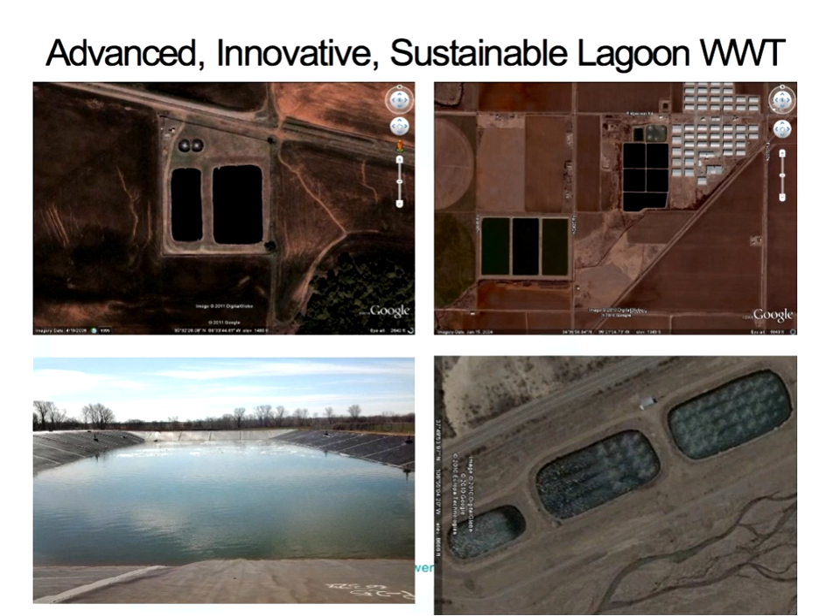So I want to thank you again for tuning in to this discussion, and people that really want to advance their knowledge, I really commend you for being on this webinar and taking time out of your day. I hope you'll learn some new information and can take this to possibly some of your clients. Next.

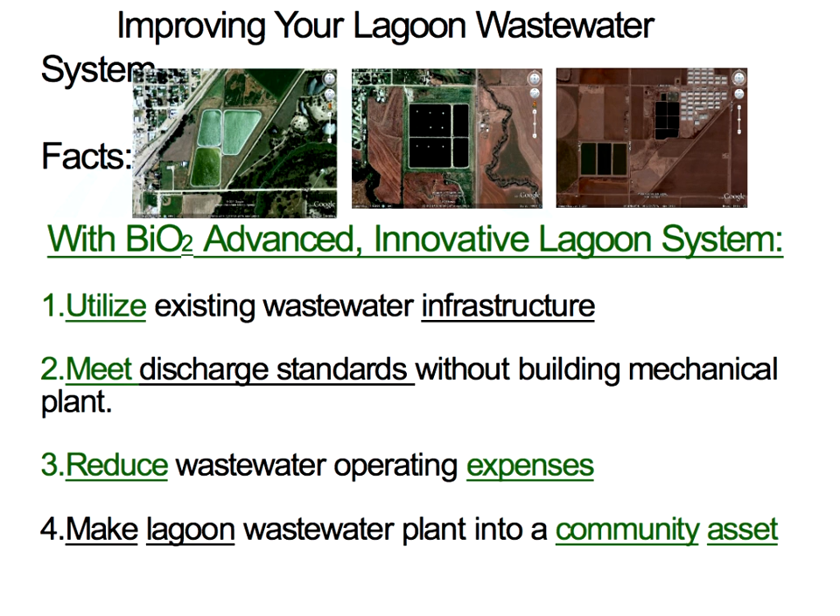Okay, there's some facts about BiO2 Advanced and Innovative Lagoon System. One, you can utilize your existing infrastructure. You don't have to do anything other than what you have, your lagoon system. You can meet the discharge standards without building mechanical plants. You can reduce your wastewater operating expenses, everybody wants to reduce their expenses. And best of all, you can make your lagoon into a community asset. Next.

We're facing more stringent standards in a lot of different areas with nutrients, personal care products, and viruses, those types of things. There is also less funding. The USDA, the Department of Local Affairs, and the state revolving funds are running out of money as well. Not as many projects can be funded, and we'll make the argument today that by putting in the BiO2 system, those funding mechanisms will be able to fund more projects over time. And of course, we're all concerned with electrical costs, which are going to continue to go up.

So before we talk about sustainable, advanced wastewater reuse, I should have put some different slides in, but we all get the point. We want to use our resources and reuse them as much as we can. When I taught this class about BiO2 across the country, there were a few things I wanted to cover when talking about lagoon systems, either new things or misconceptions I'd like to bring up right now before we go on.

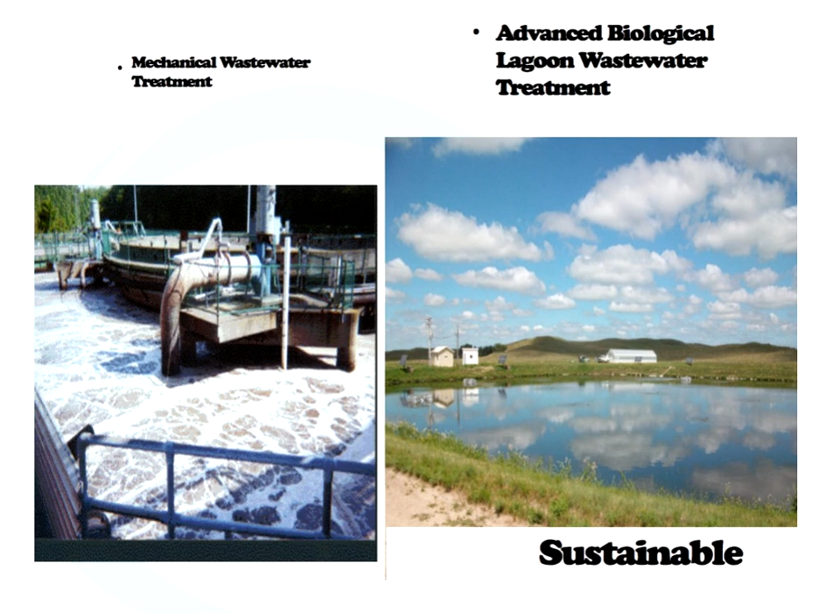Most wastewater treatment lagoons, a great deal of them, because of eutrophication and available nutrients, have a bad mat-forming algae. When I said algae, or referred to myself as a microalgae specialist, people in the classroom would turn green and their eyes would glaze over. I realized quickly that algae was a bad word, so we had to clear up the misconception about what algae is. There's bad mat-forming algae, and this bad algae is actually a cyanobacteria. Most of it is cyanobacteria in the lagoon.

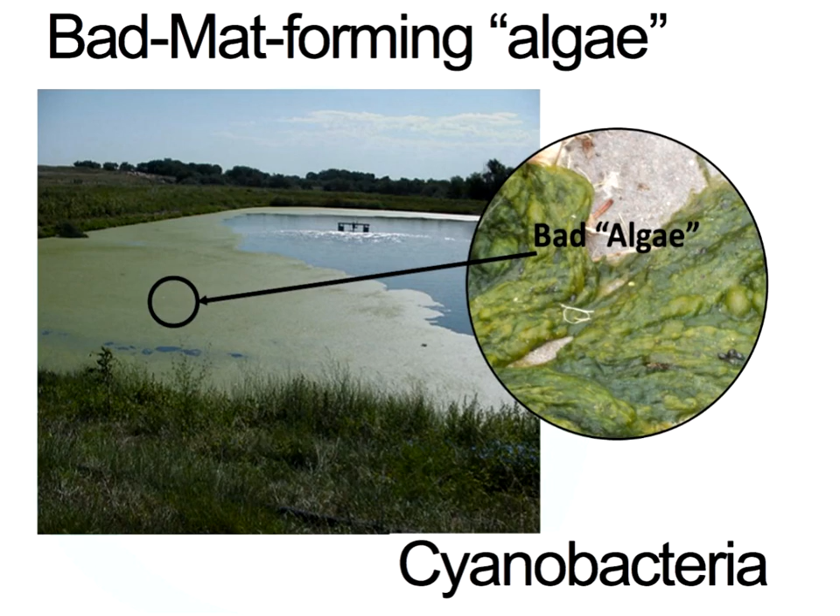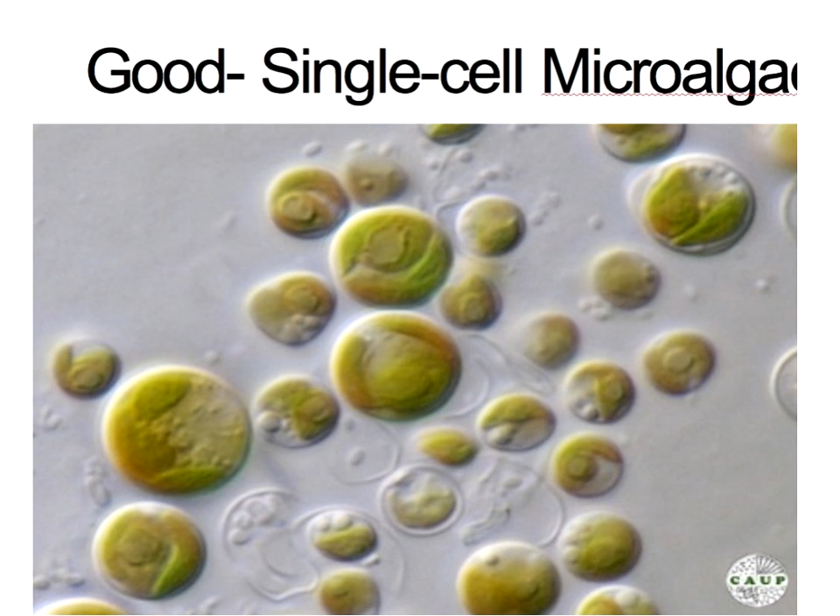Now, to contrast that, there's good single-celled microalgae that the BiO2 system utilizes to produce oxygen into the system.

The bad algae has some characteristics: it causes odors, increases total suspended solids, at times excretes toxins, can clog equipment, and can shade the lagoon. The lagoon wants to produce lots of oxygen, but it can't because the sun doesn't get into the lagoon to let the good bacteria do what they need to do.

The good microalgae that BiO2 uses are single cell. They do not form mats. They're very quick producers—their population triples or quadruples every 24 hours. They swim, and most importantly, they create pure oxygen that goes into the lagoon.

There is a symbiotic relationship between this oxygen-producing microalgae and the bacteria in the lagoon. The good bacteria population, caused by the oxygen production from the microalgae, will take the nutrients out of the water so quickly that the mat-forming algae—whose strategy is to sit on top of the lagoon and wait for nutrients to come to them—are deprived.

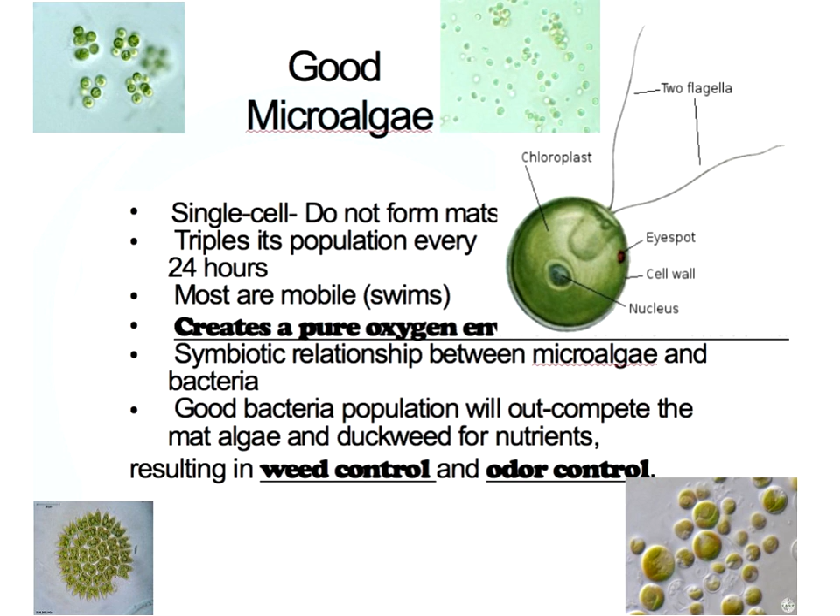So if we create a good environment with microalgae and bacteria, those bacteria can consume the nutrients and actually starve out or compete with the mat algae for nutrients. This results in weed control and odor control.

The other misconception I like to bring up from the start is air versus oxygen. Is there a difference between air and oxygen? Most of us know you need a great amount of oxygen in the ecosystem, in the lagoon, to cause the breakdown of the BOD, the waste coming into the lagoon. You need oxygen, and there are several different ways to get oxygen into that lagoon system. We'll look at a few.

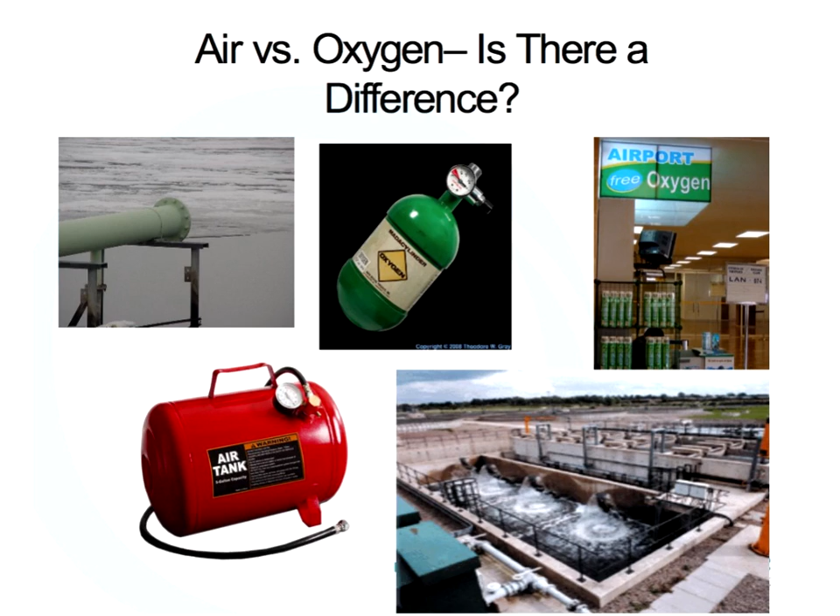In total containment ponds and lagoons that don't discharge, there's air exposure since they're open, so wind causes some oxygen to be put into the system. But it doesn't go very deep, and atmospheric air only contains 21% oxygen, so a limited amount of oxygen gets in this way.

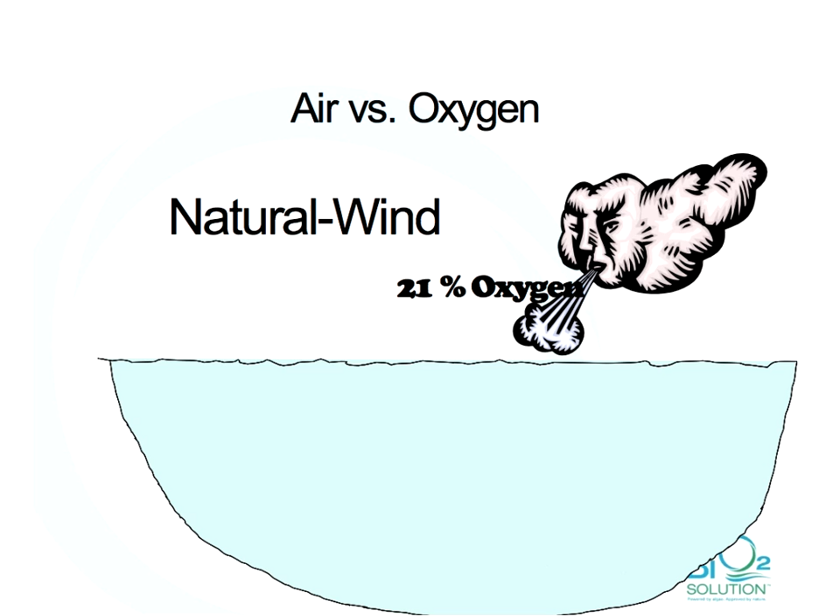Mechanical aerators—traveling throughout the country, I see a lot of different kinds. The idea is to get oxygen in, using atmospheric air to try to transfer that oxygen into the system. I've seen lots of lagoons with broken aerators, and oftentimes these broken aerators act as an anchor to put new aerators in. They can be very expensive.

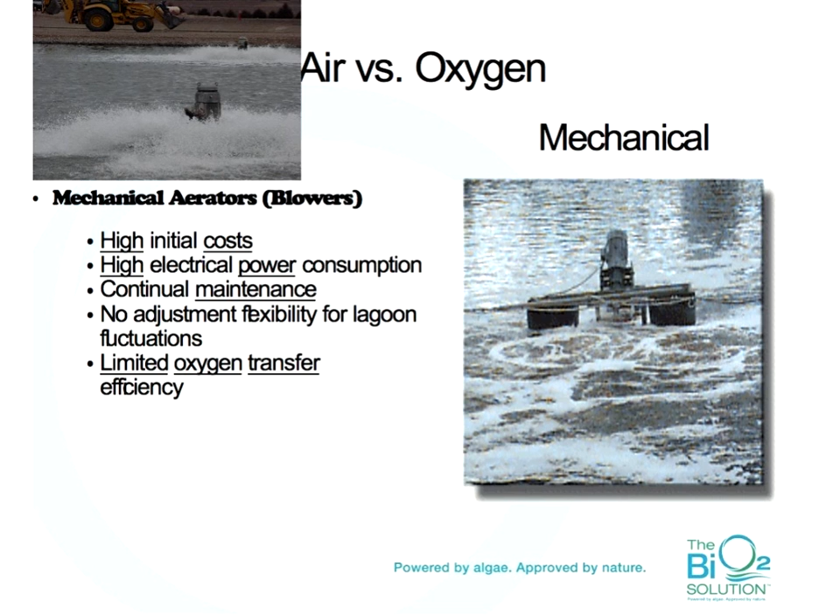Mechanical aerators have a high initial cost. Power consumption is a concern. There's continual maintenance, and moreover, there's a limited oxygen transfer that takes place through this mechanical type of aeration.

So the BiO2 solution uses multi-species microalgae, which we introduce into the primary lagoon. We create an 18 to 24 inch biomass in that lagoon, and we use a mixing system—we'll get more into that.

The microalgae that BiO2 uses, we just call them biological aerators. There's a low initial cost and a low power requirement—they're just powered by the sun. Most importantly, pure oxygen is infused into the lagoon, with no transfer efficiencies involved as with mechanical systems.

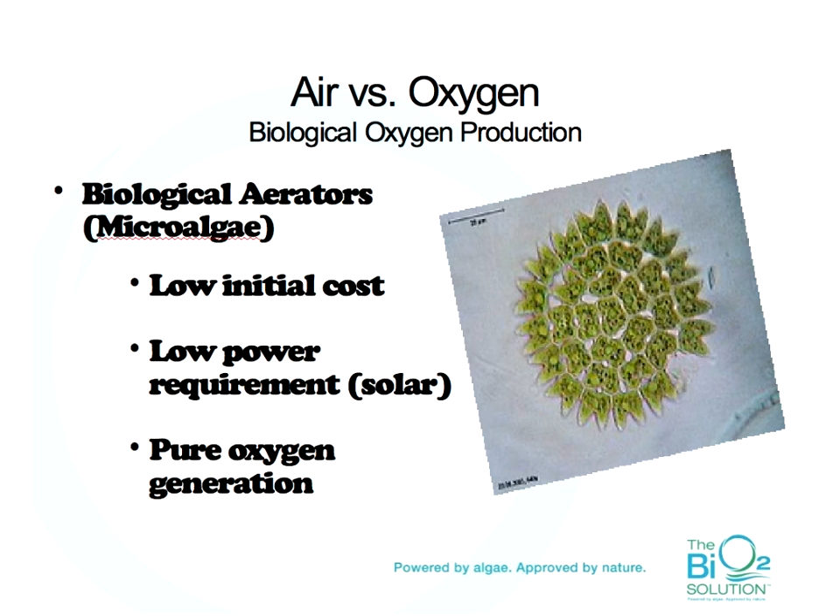The microalgae is fueled by photosynthesis—that's our power source. It's off the grid, so the power source for what they do, and how they populate and repopulate, is driven by photosynthesis.

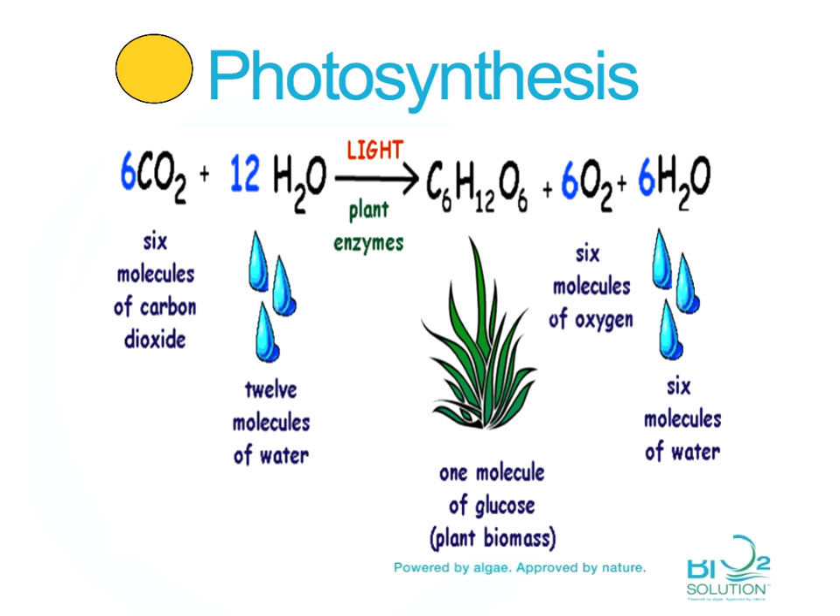There is a symbiotic relationship between the microalgae producing pure oxygen and the bacteria that consume the waste. We have the influent from the town that goes into the primary lagoon—those are the organics. Bacteria consume the organics, so you have influent that comes in as organics, bacteria that consume those organics, and in turn they give off carbon dioxide. They're an animal, so they produce the carbon dioxide that microalgae needs. Microalgae is a plant—they require CO2, they require sunlight, which they have plenty of, and in turn they create more cells.

And these new cells create more oxygen—so the bacteria have more oxygen, and the microalgae have more carbon dioxide. So you have this circle of life and a great ecosystem within the lagoon.

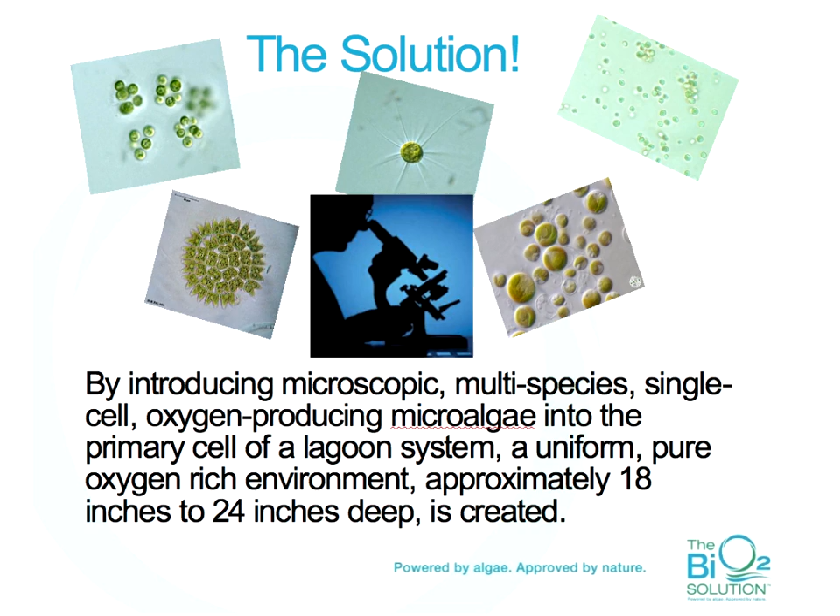We have the lagoon where the waste comes in, and on the left is what we call the biological control center. This is the heart of the system, where the microalgae is cultured and grown.

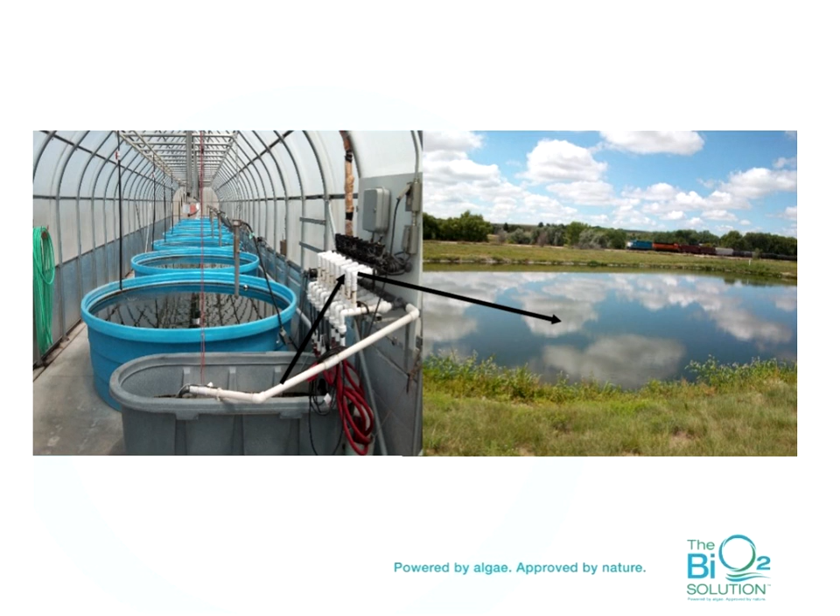Inside the biological center are photobioreactors. The blue tanks have our assemblage of microalgae where they're grown, and through a system of manifolds they're introduced into the primary lagoon.

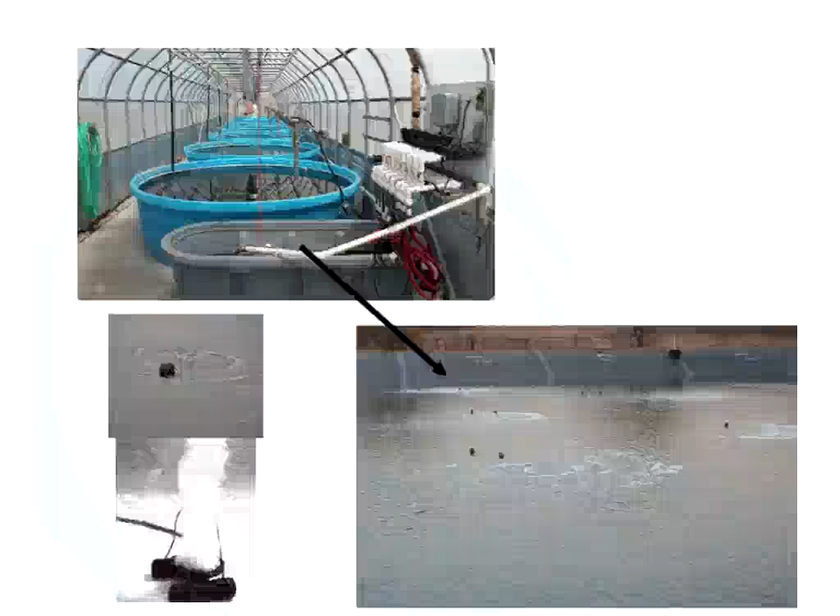From the distribution tank in the control center into the primary lagoon, we have some gentle mixing that occurs to help keep the algae, the microalgae, and bacteria in suspension.

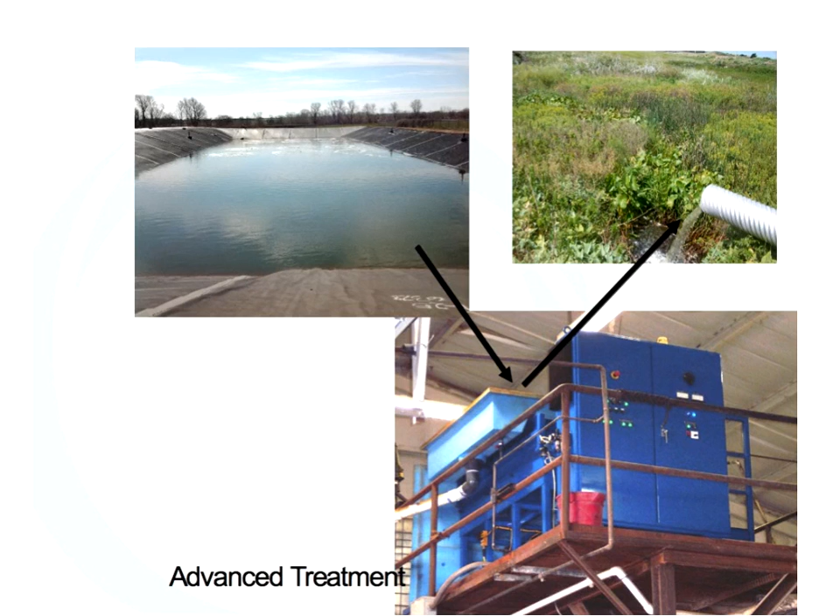So from the finishing cell, the water then goes to advanced treatment called electrocoagulation. And then from there, the water is discharged into the waterway.

So we'll take a closer look. That was just a quick overview. I know you probably have questions. The wastewater from the town enters the primary lagoon. This lagoon happens to be one we're working with in Oklahoma.

The Biological Control Center meets all U.S. building codes, and the ones we have up have withstood hail and 100-mile-an-hour plus winds. They're engineered to withstand a lot of weather types and have not had any problems whatsoever so far.

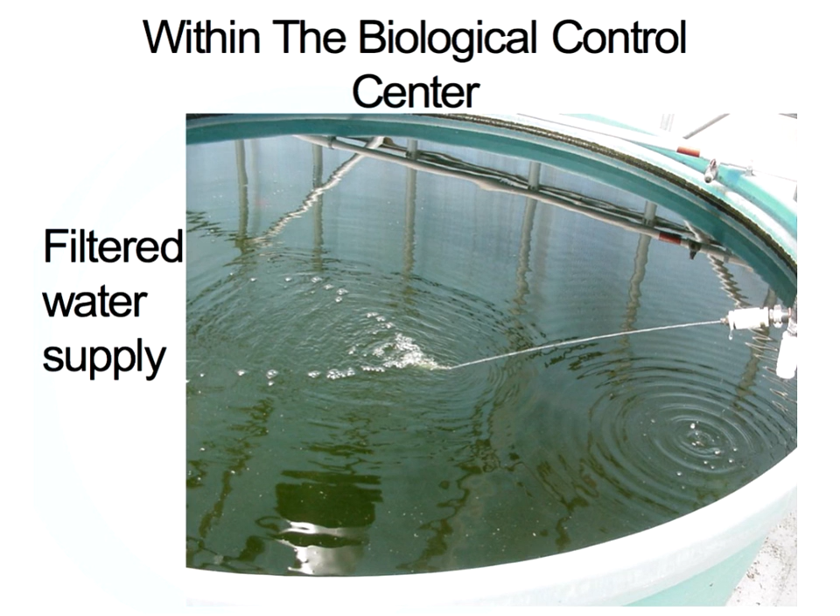Okay, inside we have the photobioreactors. This is where the microalgae is cultured. It grows very quickly. We have a filtered water supply from the town that comes in. If it's chlorinated, we have filters that take out the chlorine, because microalgae don't like chlorine, but we have fresh water come into each bioreactor.

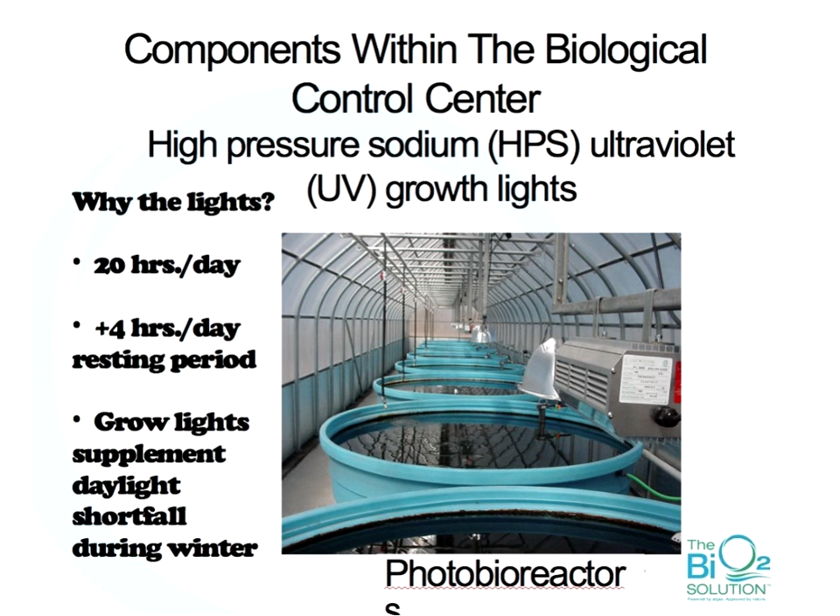We have lights, high pressure sodium, ultraviolet, and we're working on a few different things to experiment with some LED lighting, that type of thing, to try to keep the cost down on everything we do. I noticed some of our slides are a little bit off, they're just coming across this way, so I apologize if it looks like the photobioreactor at the bottom should be on one line, but it's actually on two. But that's okay, we're just getting the idea.

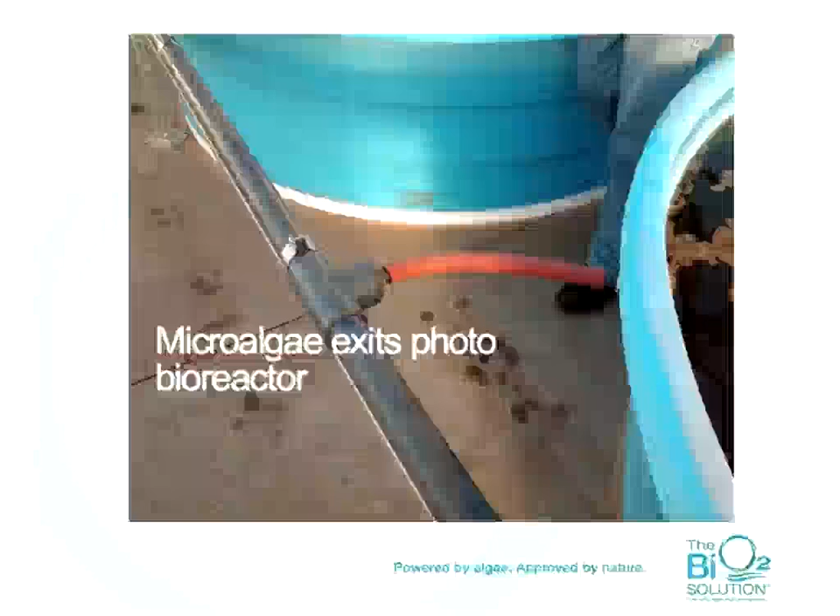In each bioreactor, the fresh water comes in, the microalgae grow, and then exits out the side of the bioreactor and goes into a line, and it's gravity fed. Actually, if you don't mind taking a couple of questions, Judd.

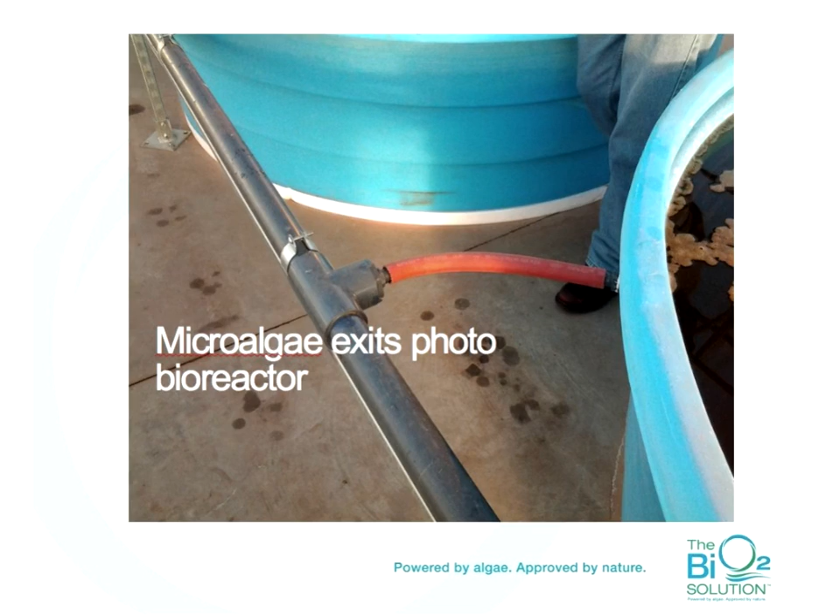That's a good question. As part of our patent, there's an assemblage of microalgae that's really different in different parts of the country. The microalgae goes along the distribution tank, but it's multi-species - we don't want to use a monoculture. If something kills the algae in there, we have more than one species that will pick up the pace for oxygen production.

During the day, we get well over 25 to 30 dissolved oxygen readings. So we really know the tanks are working because we get lots of oxygen in those tanks. The multi-species are common strains that occur in every state - we can't tell you exactly which ones. We look for oxygen production as opposed to microalgae that produces lipids for biofuels. We're strictly in the oxygen-producing mode. I hope that answers your question.

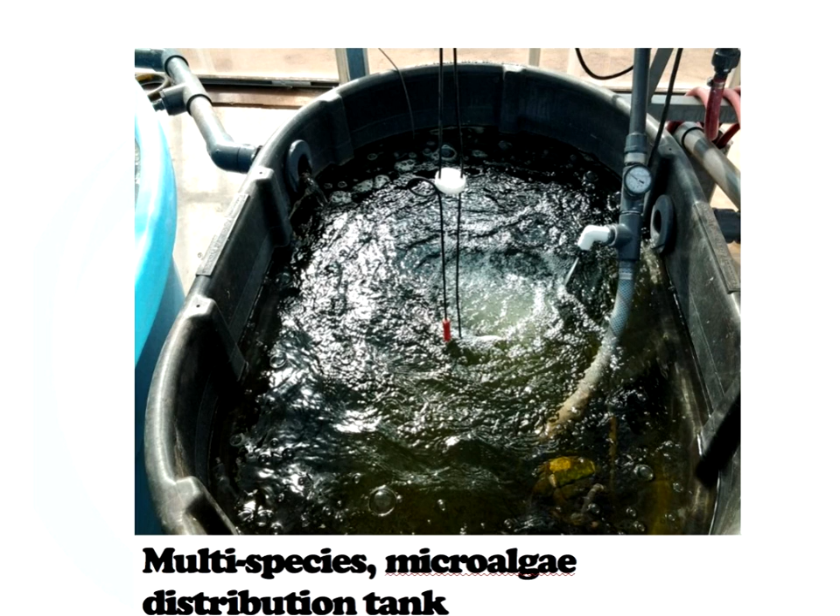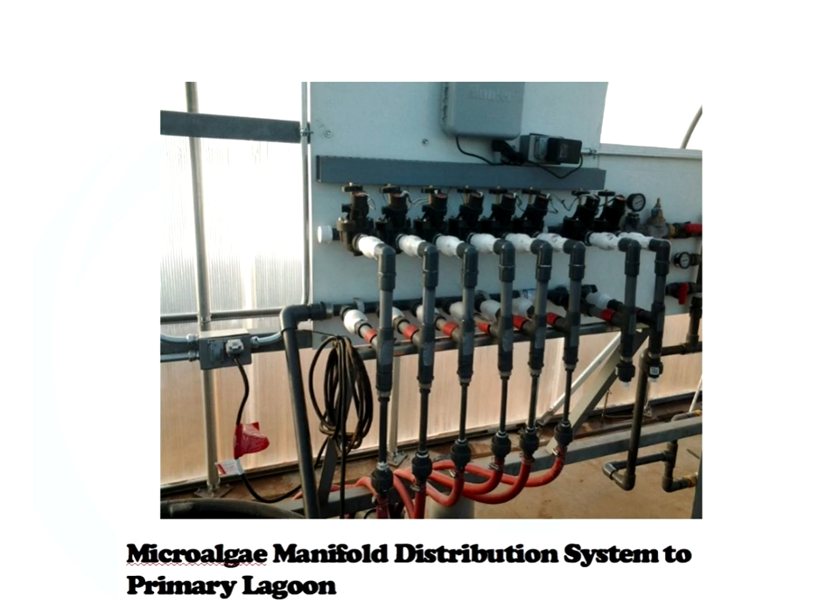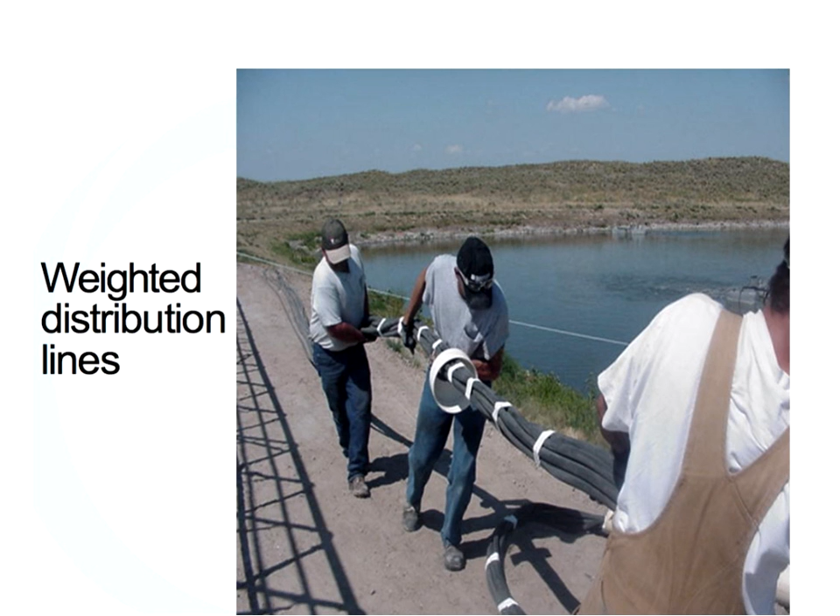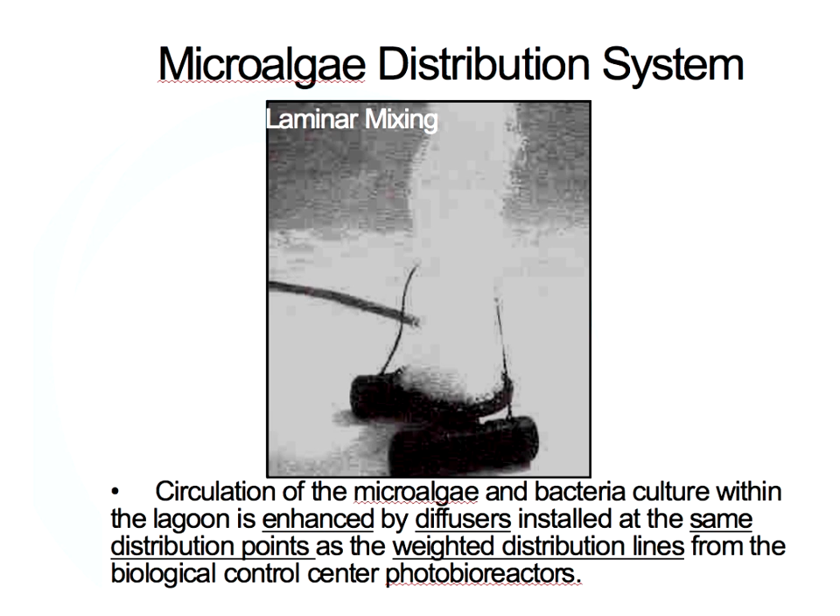Part of the distribution system is a laminar mixing fine bubble diffuser, and the microalgae goes to the same points where these diffusers are, so the microalgae goes out into the lagoon. The mixers take the microalgae and put it up toward the top for better sunlight and better mixing, to get a critical mass of oxygen for the bacteria.

Those mixers can be driven either from the grid or from solar. This is a project out in eastern Colorado where they chose to use solar for the mixing system.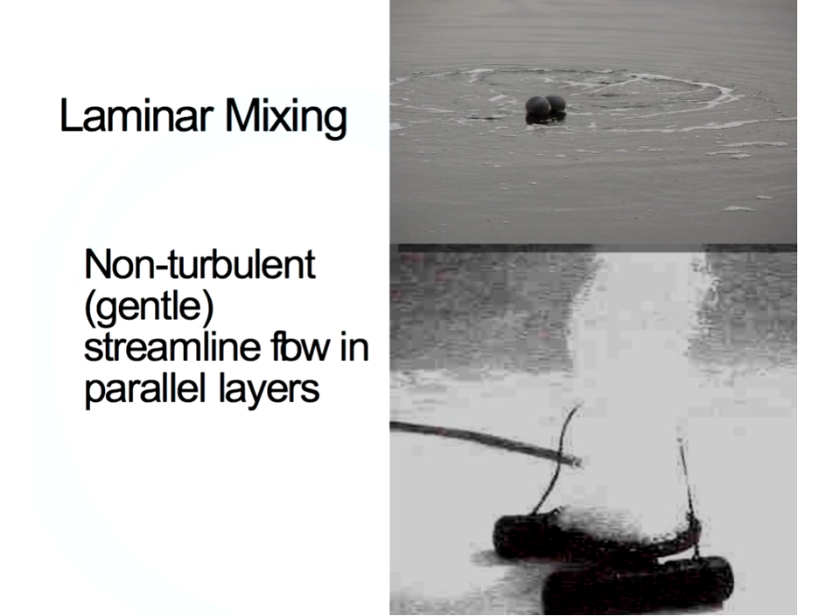Laminar mixing is defined as a non-turbulent or gentle streamlined flow in parallel layers. The microalgae enters where the microdiffusers are, and at the top you can see those little black things - those are there just in case there's ever a problem with a diffuser or an algae line. They're tied to those lines, and you can pull them up to do any maintenance or replacement that may be needed. We've never had to do that, but we have those there just in case.

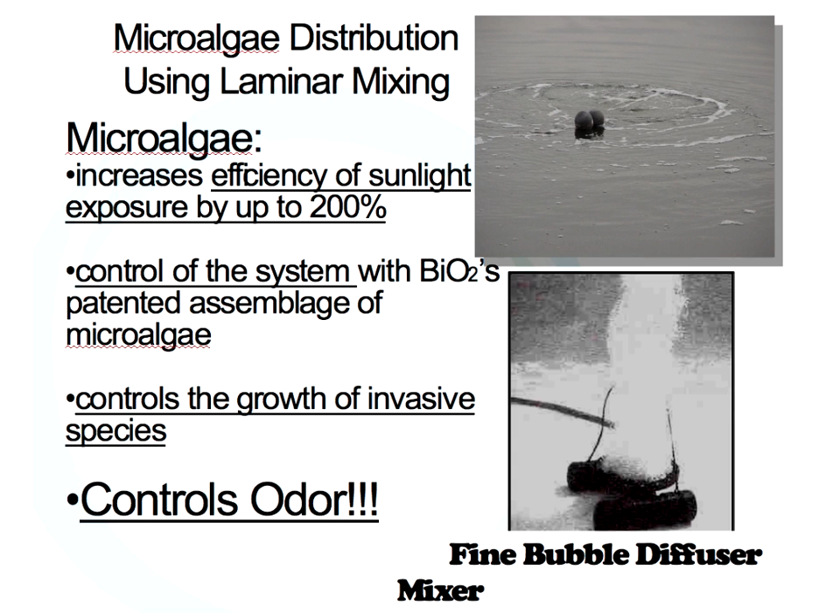By using this mixing system, it increases the efficiency of the sunlight 200%. We have control of the system with the patent assemblage of microalgae, because we put in the microalgae on a 24/7 basis. So you have a flow-through event with the lagoon. We're always putting new microalgae in to produce as much oxygen as we can. It also controls the growth of invasive species. Because of our continual introduction of our assemblage into the lagoon, we can control what species are there and how much oxygen is put in. And best of all, because there's so much oxygen that's created, it controls odors in the lagoon.

Okay, this is just more about the laminar mixing. So you have a continual exposure to oxygen and the bacteria to consume the BOD and TSS within the wastewater. And again, it's pure oxygen that's produced.

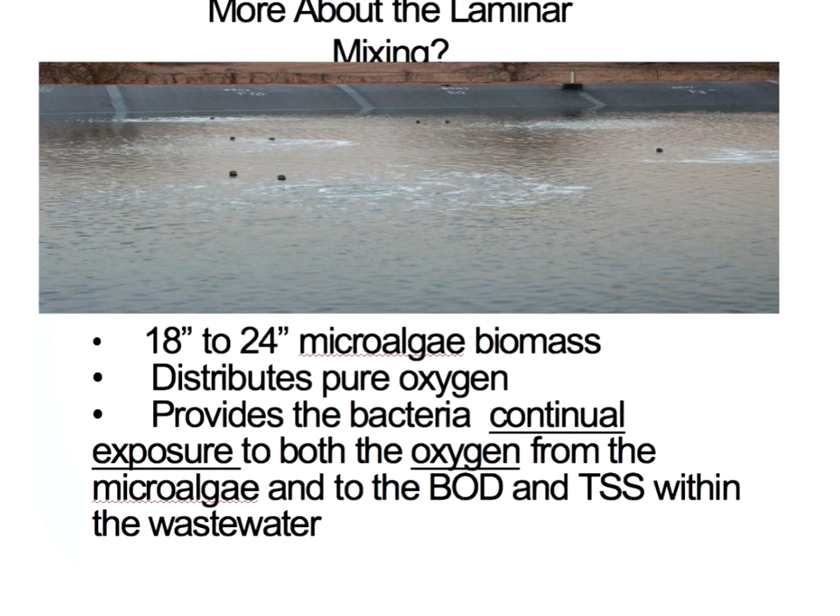So how do we know how many diffusers to put in? Well, it depends on the suspended solids, the total volume of wastewater, but most of all, depending on what part of the country it's in, cold or warm. We have the diffuser placement so we can yield the greatest possible mixing situation and the optimum breakdown of the waste that's in the lagoon.

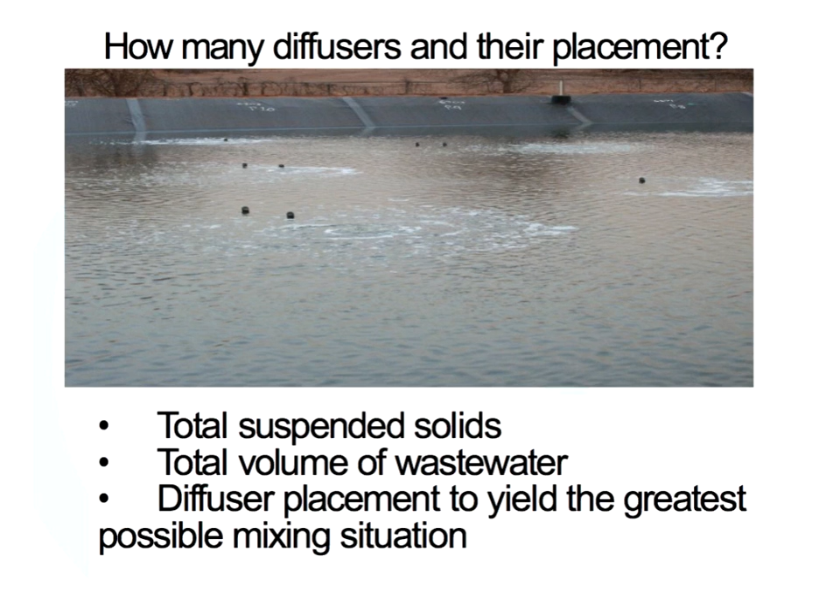Next. So most of the lagoon systems that we work with are 3 cells. In cell number 1, the waste comes into that cell, and we do most of our mixing, and the microalgae does its work in this first lagoon, and then everything goes into the second lagoon. If there's any more BOD and TSS, food, we still have the microalgae, we still have sunlight, we still have CO2 from the bacteria, and as it moves down, the waste breaks down more and more until we go to a finishing cell. It's a quiescent zone, and from there we take the water into advanced treatment.

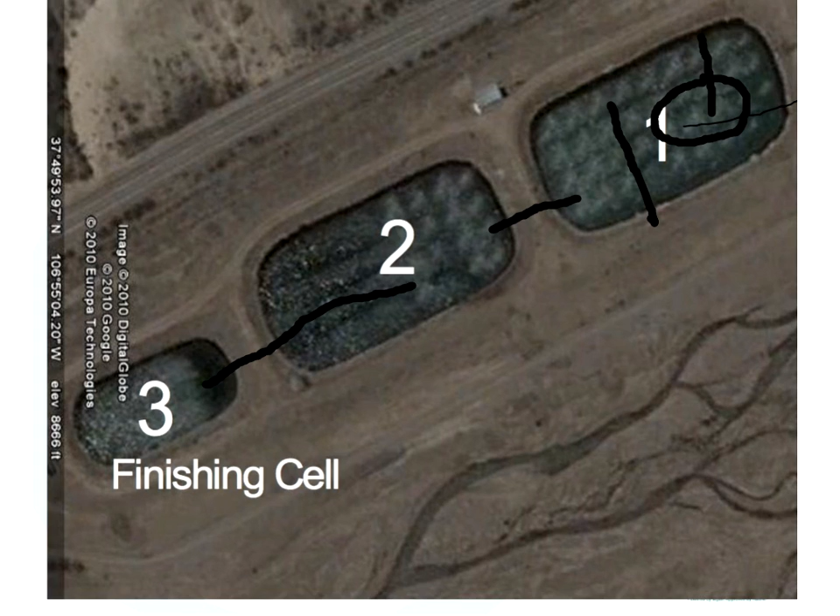The point on this is we've worked with systems that have as few as 2 lagoons, and we've worked with towns that have up to 19 or 20 lagoons even. So we can take smaller lagoon systems and put curtains in to have more hydraulic retention time, go through those lagoons. There's a lot of things we can do with lagoon systems to supplement what we do with the microalgae.

Question as to whether this would work with just a single lagoon system.

Well, we have to look. That really depends on the size of the lagoon. It depends on the organic load coming in. It depends on how much hydraulic retention time we have to break things down. Most of the time you need hydraulic retention time, which is the amount of time once the water enters the lagoon, that a number of days it takes to go out of the end of the system. If you have a very large lagoon, conceivably you could curtain it off and have curtains and baffles and have a quiescent zone all in one, but that would depend on, again, the organic load, and every situation we can look at and see if there's enough time to do that.

You need number of days in a lagoon system, mainly because the fecal coliforms have to be broken down by sunlight, but with our advanced system, we could alleviate that problem with our advanced treatment with electrocoagulation. And we'll talk about that here in the future.

Okay, and there was a question about winter operation, if the lagoon surface is freezing. Okay, I'm looking at some of the other questions. Hold on.

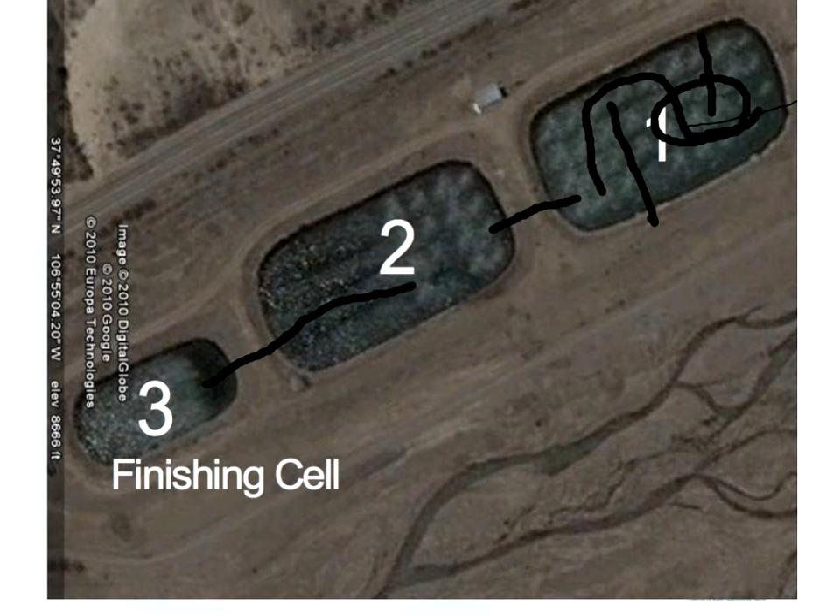During winter operations, part of the reason we choose, well, we want the optimum mixing situation, so we simply put diffusers closer to each other. Some of them do freeze over, and that's some of the problems with lagoon systems. You have upset conditions, part of which is freezing, and you don't get the fecal breakdown. Part of it's upset conditions with people dumping septage illegally into the system. There's meth labs that are put in, there's things flushed down the toilet. There are herbicides, pesticides, those types of things that could really cause havoc to a system. That's another reason we put microalgae in on a 24/7 basis, to regenerate that system very quickly. So for the freeze problem, we simply put the diffusers closer together, and we have the advanced treatment with EC to ameliorate those problems that we just talked about. So that's a very good question. We can put these in northern climates as well.

Denver, was there another question, a quick question? So we could simply use a liquid only diffuser, much like what we use in streams and oceans.

I'm not sure I understand that question, but on the surface that sounds like it could work, since we don't use the diffuser for oxygen production per se. Anything that would produce a laminar flow, I think, would be okay. It depends on how much liquid it would add to the overall system and how much loading time it would cause.

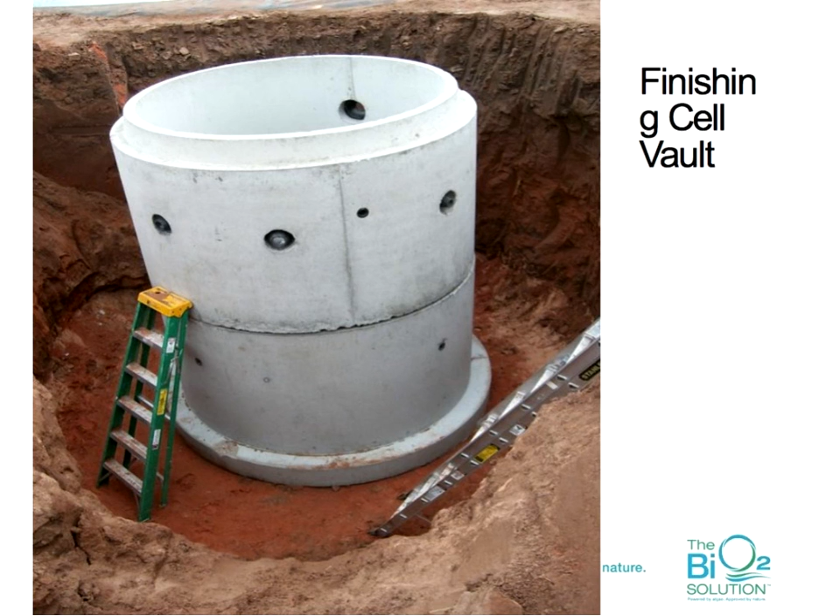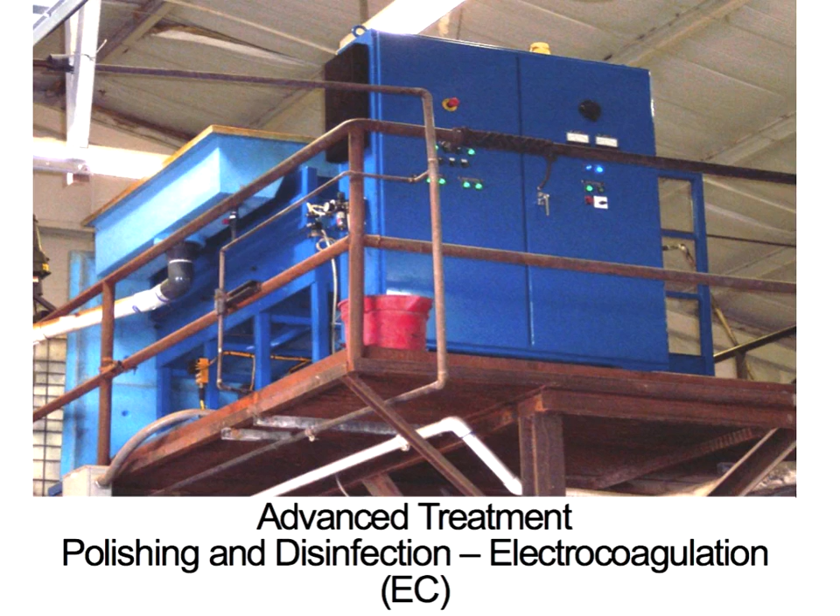And so from this finishing cell vault, next we go to our advanced treatment, or polishing and disinfection system, called electrocoagulation.

Most of you probably don't know what electrocoagulation is. Quickly, there's a chamber in the system that has metal plates that are 1/8 of an inch thick, with an 1/8 of an inch gap between each blade, and we create an electrical charge.

There's usually 217 of these blades in a chamber. We put a positive charge and a negative charge on each end of the chamber, and we take electricity off the grid and flood the wastewater with electrons. This allows the suspended matter to become larger particles.

And then from there you can go to a secondary separation. There's a lot of different ways to do secondary separation. But some of the ancillary benefits are that electrocoagulation breaks emulsions, such as fats, oils, and greases, and it also oxidizes heavy metals. Heavy metals can, in this system, go to an oxide form where they can be put into a regular landfill. So it has a lot of different uses other than disinfection.

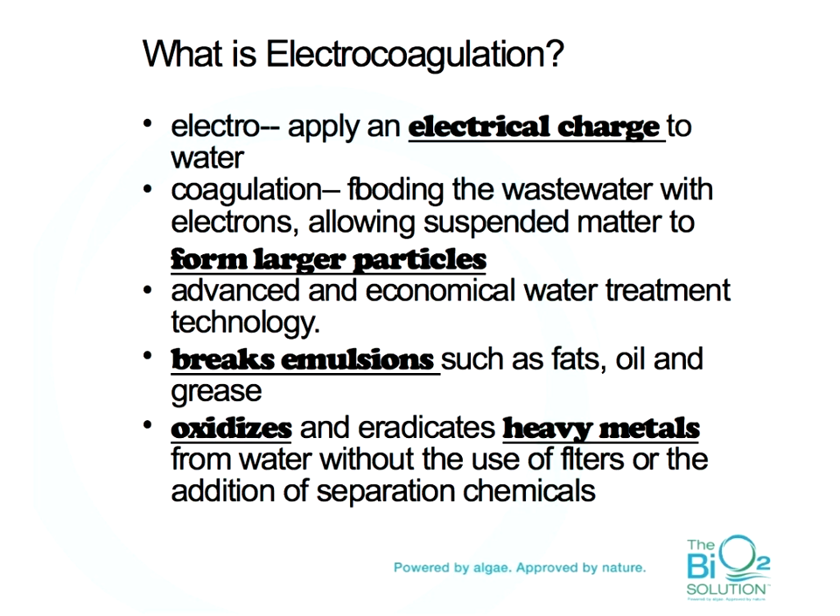So we'll show some of the results from electrocoagulation. Kevin says, I've seen something similar for chelating metals out of landfill leachate. That's correct - it does a very good job on the metal ions, turning them into an oxide form that can then be put back into the landfill. So heavy metals is a really good thing that electrocoagulation does.

There are some different types of electrocoagulation, and you'll learn the differences - some cost more, some cost less. You really have to look at the operating costs of all the machines to make a good decision on what type you use.

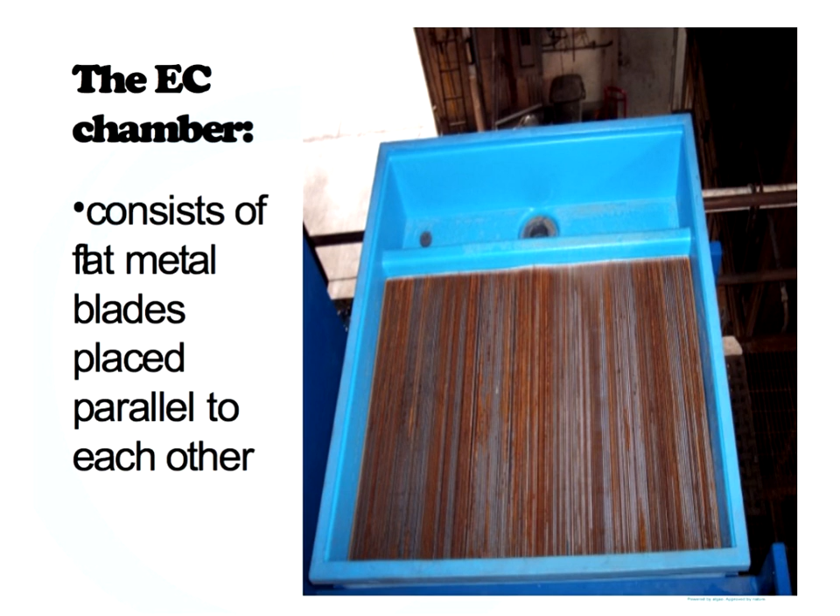That's a very good question or observation. So the EC chamber has these metal plates, 1/8 of an inch apart, and they're placed parallel to each other, with a positive charge on one side and a negative charge on the other.

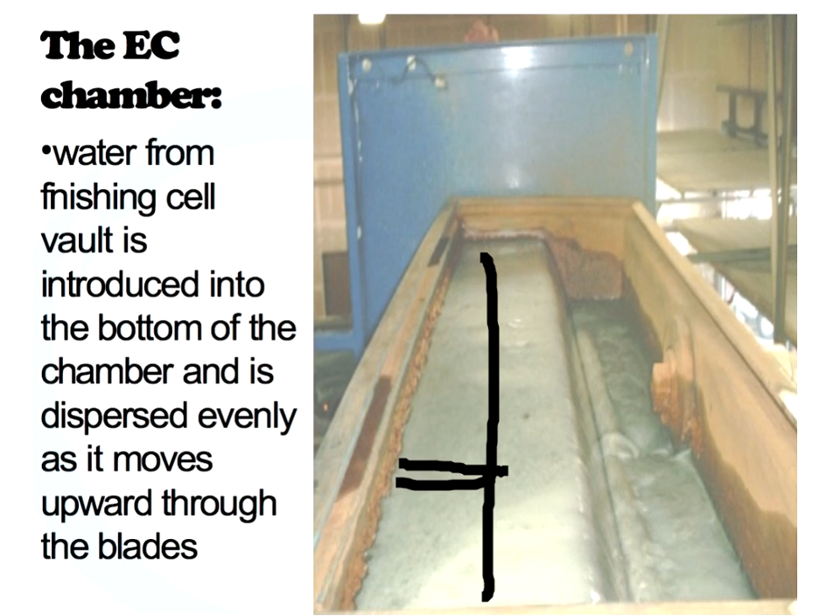So you have the water coming up through those plates, which are parallel to each other. The water comes up through the plates, goes over a weir, and then goes to secondary separation. We most of the time use a tank within a tank that separates everything. Because they're larger particles, they settle out very quickly, so we have a cone bottom tank - the particles go to the bottom, clean water comes to the top, and then out of the system.

These are the plates that are used - this is a project in Oklahoma again. You can see the poles that we use for the anode and cathode right here, and all these metal plates then go between those two plates on each end. So the water then goes up through, and the water is filled with electrons.

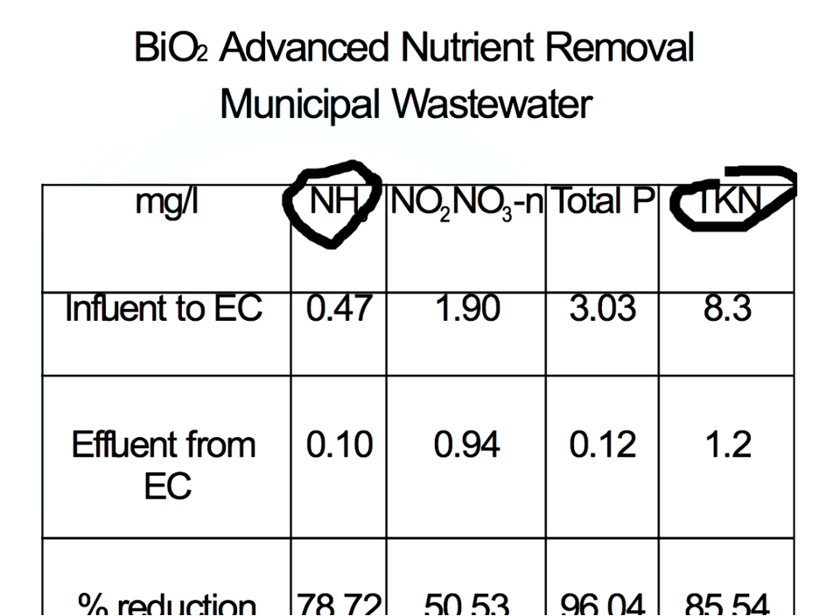Some of the things with the BiO2 advanced system for nutrient removal: we have ammonia, nitrates, total phosphorus, and TKN, total kjeldahl nitrogen. We get some removal rates with those. We're going to talk more about ammonia in our advanced session the day after Earth Day, the 23rd. We have a process we can use even in the winter for ammonia especially, and phosphorus especially, called the Struvite process. I'll just mention it now - we can essentially get all the ammonia and all the phosphorus out, and we'll get into that later in a later session. That's a little more advanced than we want to get to here.

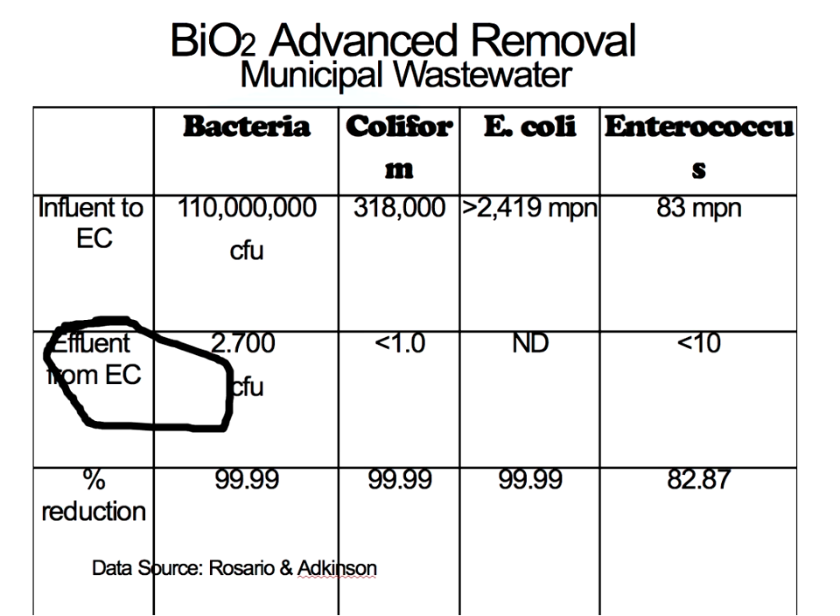So for bacteria, E. coli, you can see the influent to the EC and effluent from the EC. We've gotten a 4-log reduction, or 99.99% reduction, in most of the bacteria that is in a wastewater system.

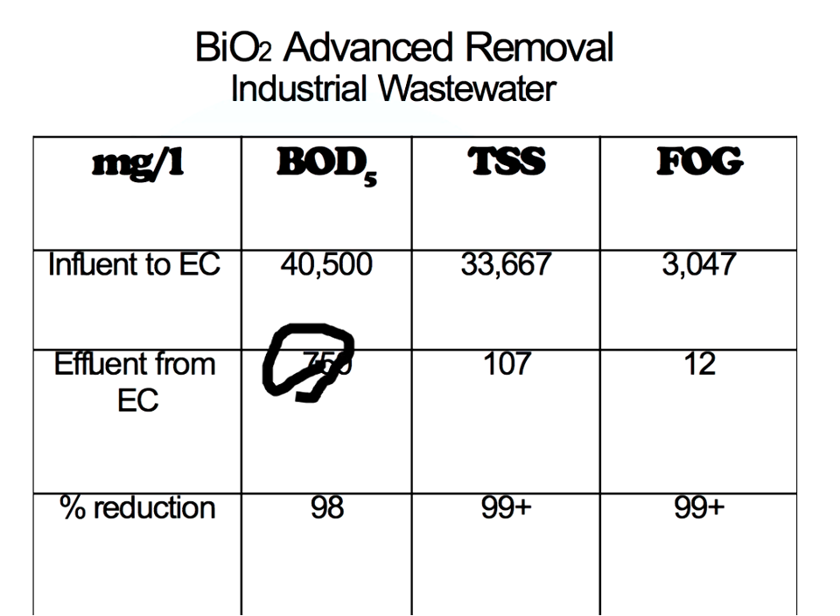For industrial wastewater, we've treated really high BODs and TSS, and we've gotten the effluent numbers down in the 98-99% reduction as well.

The electrocoagulation, or the advanced system, does a very good job of removing things with... I'm drawing a blank here, I'm sorry. Anyway, we won't go into more detail on the EC unless I'm asked.

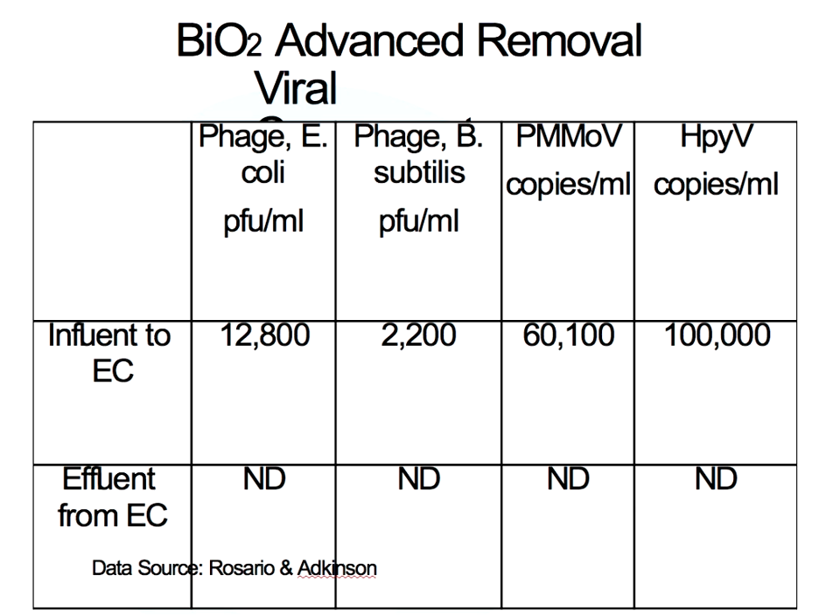Viruses, pharmaceuticals, personal care products - we're doing some research with the University of South Florida that is proving out to be very effective on those components as well in the water.

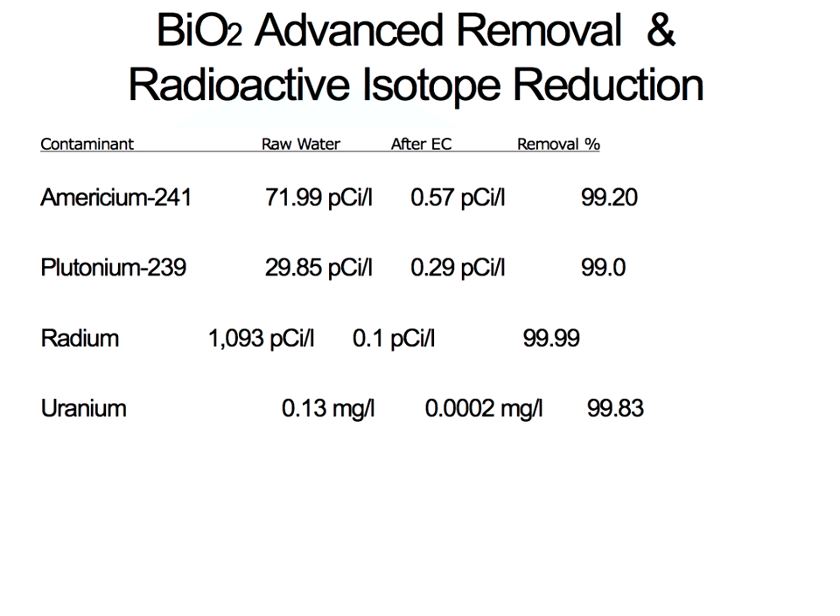Rads, or radioactive materials - it's very effective on radioactive materials. You can get those constituents down into background levels. They can go into a regular landfill - they'll pass the TCLP test, which is a test that shows what that amount is, and shows whether it can go to a landfill safely, a non-hazardous landfill.

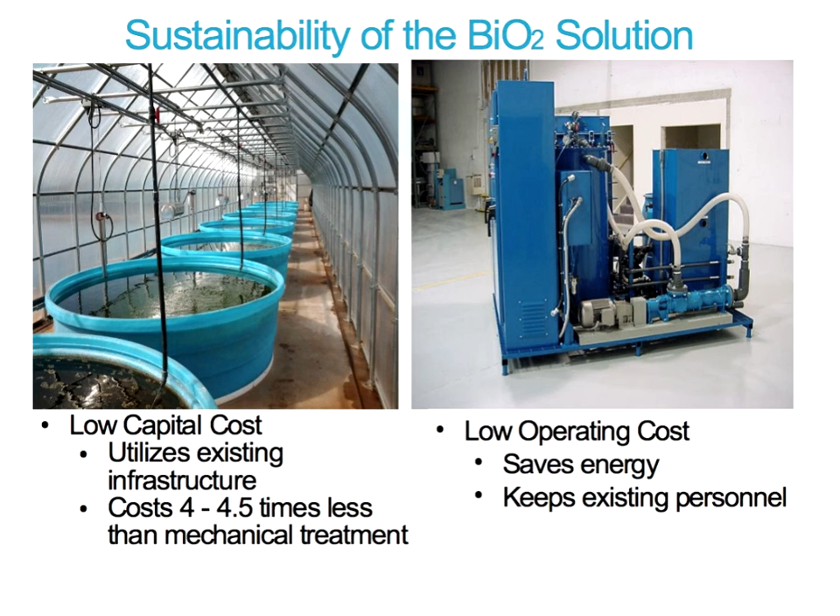So to wrap this up, the sustainability of the BiO2 system really hinges on the low capital costs and the low operating costs. Under capital cost, it utilizes existing infrastructure and costs 4 to 4.5 times less than a mechanical treatment plant. As far as operations, it saves energy and you can keep your existing personnel. So if you have a town that has a C operator, there's no reason to change and get a different operator - the C operator can stay there. It's very sustainable.

And really, talk about sustainability - it does help with upsets in conditions like icing and illegal dumping. The EC will really even out those year-round events that happen. So let's look at the system capital costs.

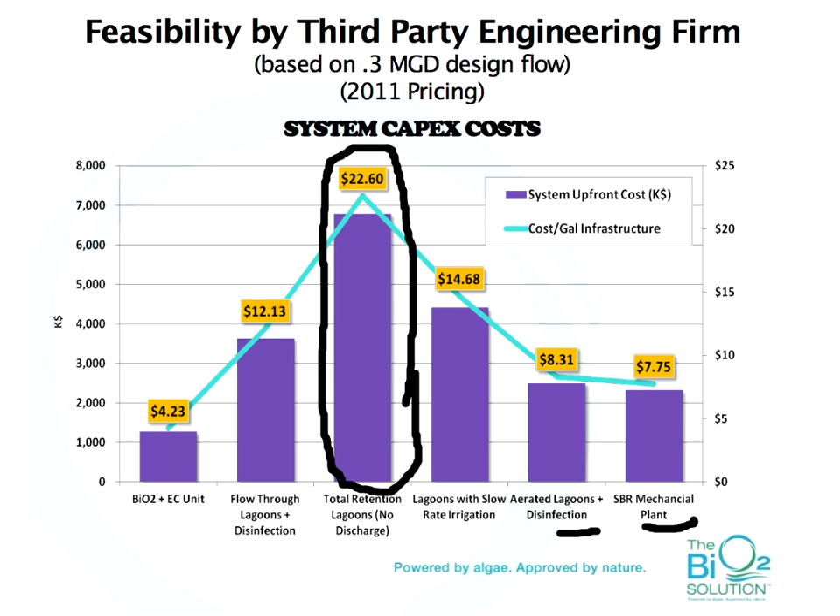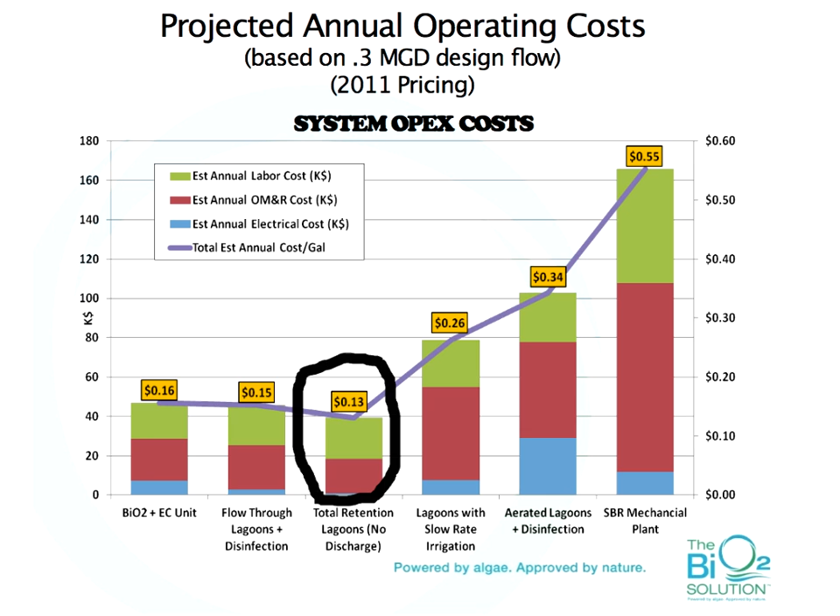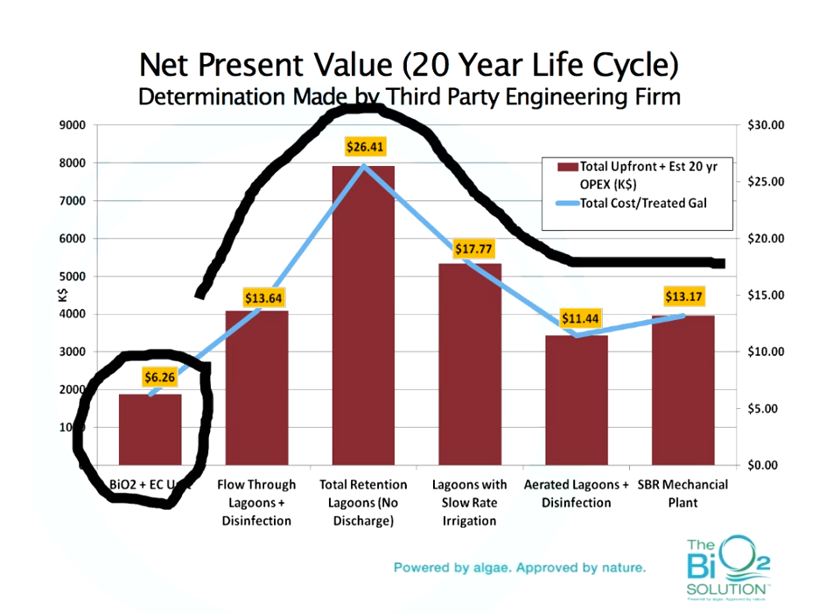So the number here is the total estimated annual cost. If we look at these systems with an operations cost and a capital cost, the next slide will show you an overall figure - it's the capital cost plus a 20-year operations cost, so it's a 20-year life cycle cost. This was determined by a third-party engineering firm based on 0.3 million gallons a day. The BiO2 system here was much less than any of these others that were studied, so sustainability is a very important aspect to the BiO2 system.

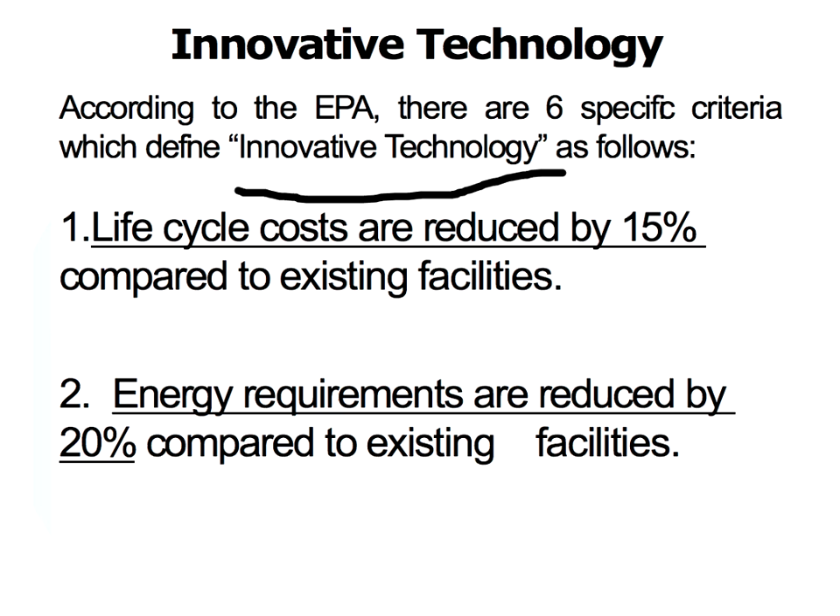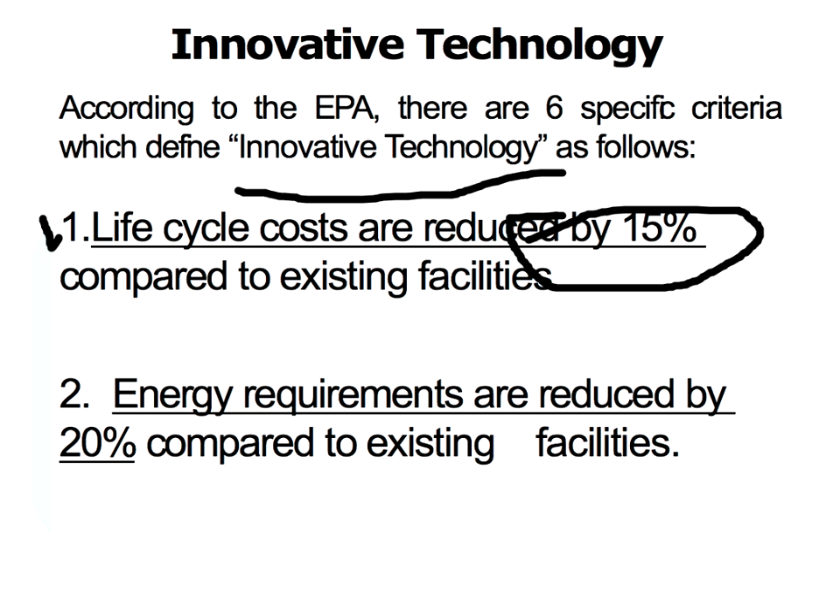At the beginning of our program, we talked about innovative technology. There are some funding mechanisms or funding opportunities for innovative technology, and according to the EPA, there are 6 specific criteria which define innovative technology. The life cycle costs need to be reduced by 15% - BiO2 does. The energy requirements must be reduced by at least 20% compared to existing - BiO2 does.

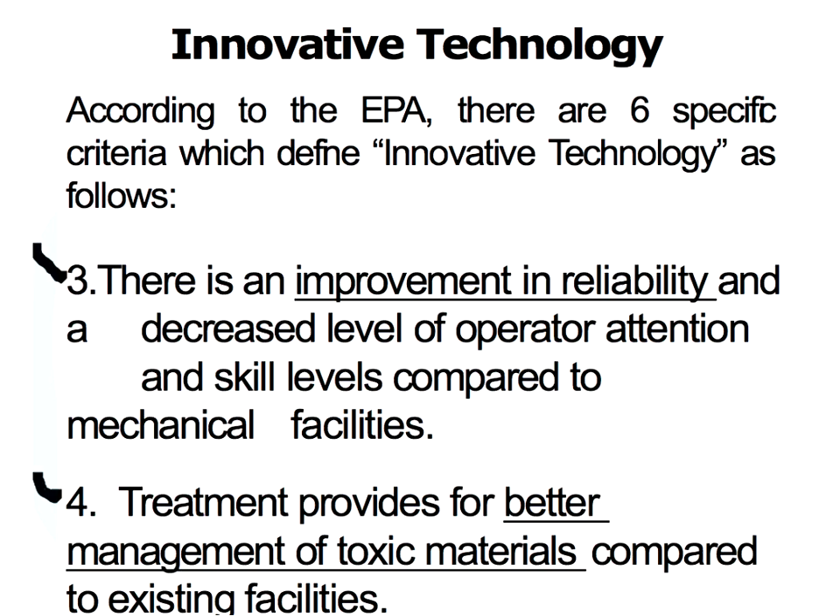There needs to be an improvement in the reliability, and because of the advanced system, we have improved the reliability because of the redundancy that most DEQs require with the advanced treatment and EC. So there is an improvement in the reliability - BiO2 does. And treatment provides for better management of toxic materials - we've talked about metals and Rads and all kinds of toxic materials that come in. EC does that.

There needs to be an increased environmental benefit. All that we talked about, the BiO2 does increase the environmental benefits compared to existing facilities. So the last one: the technology must improve benefits of joint municipal and industrial wastewater. For those towns that have like meat packing plants and industries dumping their waste into the municipal wastewater treatment plant, there has to be increased efficiency in either pre-treatment or something like the BiO2 system, which will help with the capacity of the municipal system that comes in. The BiO2 also does that.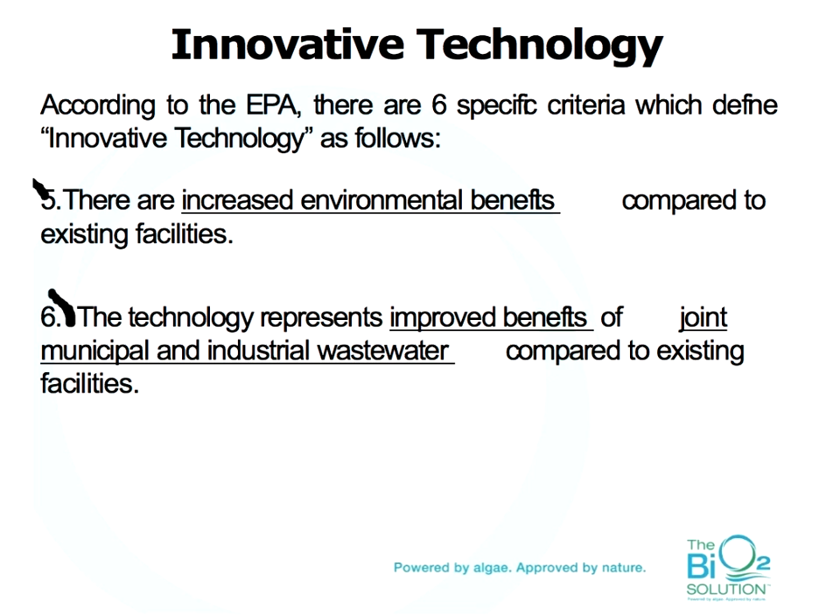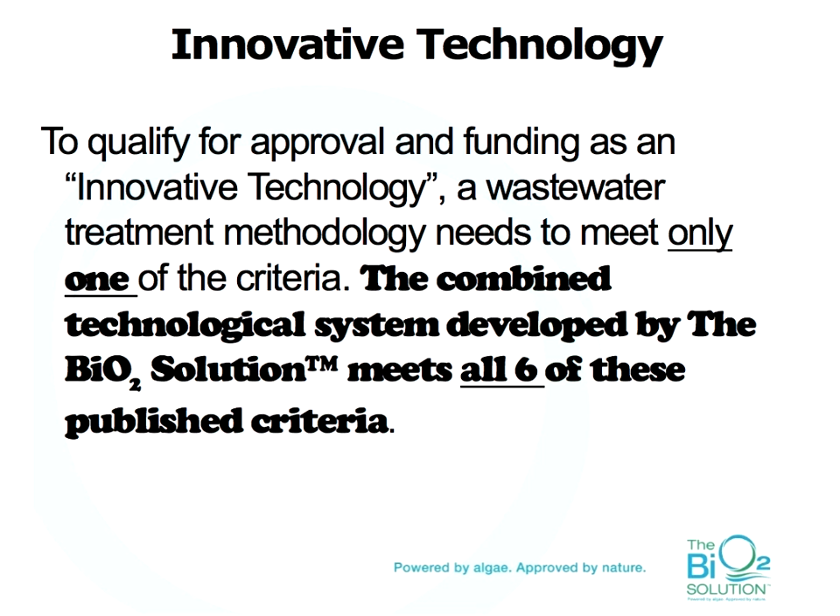To qualify for approval and funding as innovative technology, the treatment system only has to reach one of those criteria. So the combined system developed by BiO2 meets all 6 of these published criteria.

Best of all, we have really satisfied the funding mechanisms. With the BiO2 system, you can build more BiO2 systems with the money that's provided. You can satisfy a lot of what the EPA needs, you can meet the stringent discharge standards, you're more affordable, and the electrical cost and operations cost makes you look better because you use a lot less electricity and energy, and you make the town more sustainable.

So the best part of this is: your wastewater lagoon can be an asset to your community. Thank you very much for going through this.

I'll answer this question: what are the effluent characteristics of the BiO2 alone?

We only have one system that doesn't have the advanced system on it, and it's in eastern Colorado. We have the effluent characteristics of the BiO2 alone - in that system we start with somewhere around 150 to 175 BOD, about the same with TSS, and we've gotten down. They've never been out of compliance since we've been there since 2008. What we're looking at is for that system to add an advanced EC unit for events in the future, for icing, for any illegal dumps. They've had a couple problems with fog, fats, oils, and grease - someone dumped a big source of fat down the drain illegally, it plugged a 15-inch drain and caused a lot of problems. We also had an illegal dumping of an herbicide that killed the whole system. So with the advanced wastewater and EC, that will alleviate those issues.